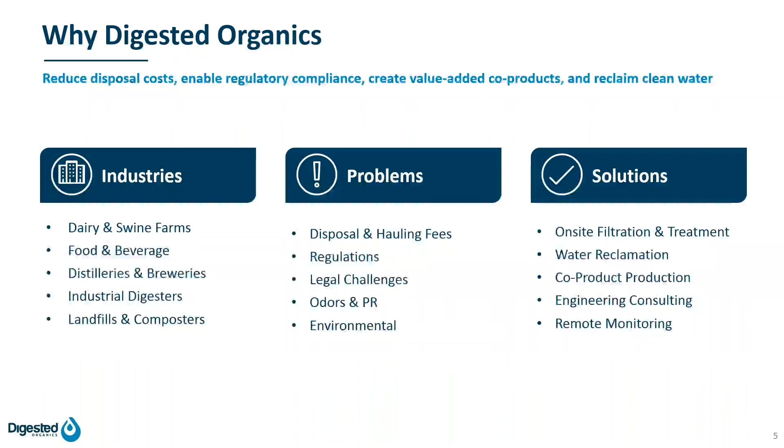They're dealing with ever-tightening regulations. Typically, they face some kind of legal challenge, whether it's to expansion or siting or waste disposal. And they're facing public perception about their waste streams and environmental issues as well in terms of watershed management. We hear a lot about algal blooms today, contamination in the Chesapeake Bay and the Great Lakes. So it's a challenge that's pretty universal. Our solutions are on-site systems that transform waste into clean, reusable water, value-added co-products, and when possible, renewable energy.

A little bit about our team. I co-founded the company about 7 years ago now. My PhD is in chemical engineering from the University of Michigan. Before that, I studied microbiology at Middlebury College in Vermont. That's where I first got into working with cows and dairy farms that had digesters. My first startup company was an algae technology company where we produced animal feed. So I spent about 8 years producing feed ingredients for animals, and now I spend a lot of time working on the back end of animals, helping manage their manure.

Our chief engineer is Ian Charles. He has a long history of experience in clean tech, ran a wind turbine company, a very thoughtful and creative mechanical engineer that does a lot of our design work. And Don Heilman is in charge of business development for the ag sector. A lot of years working in Wisconsin, helping farmers develop solutions for clean water. And I'll just point out too that one of our lead investors is Ceres Partners.

They have a large land holding base as well as a venture type fund that invests in companies like ours that are doing unique, sustainable things in the food and beverage space. So we have 4 key technologies.

I'm going to really highlight 2 of them today in the interest of time, which is our 2-step reverse osmosis and our stainless steel ultrafilter. But in general, we pride ourselves on developing polymer-free and fully automated solutions.

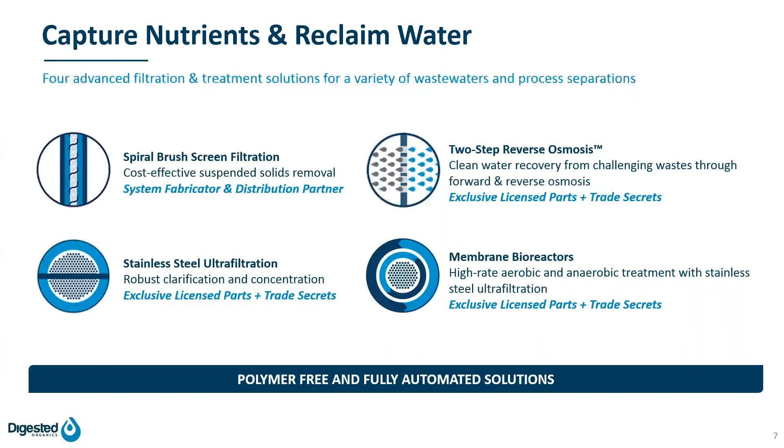So very briefly, we have a spiral brush screen filter. This is a lower cost filter that can process manure and other wastewaters to remove particles that are larger than typically around 10 microns. So the tightest screen is very effective when you have a high amount of suspended solids, like in a food and beverage wastewater or a manure, and you're just trying to reduce that load.

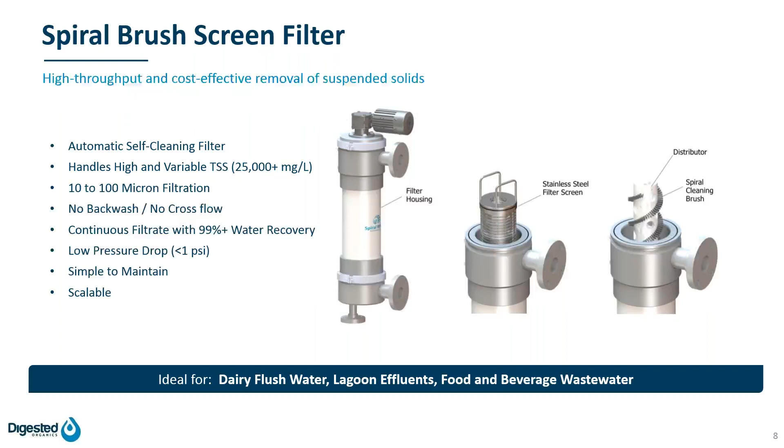Helps keep dairy lagoons cleaner, helps reduce surcharges that a food and beverage manufacturer might have, and it's relatively cost effective, so we can do very high throughput in a relatively small machine pretty cost effectively.

This is a very unique proprietary technology we have called ultrafiltration, which uses stainless steel tubular membranes. And the secret sauce here really is the tubular membrane, its porous structure, and how we can pump the liquid waste we are trying to filter through the inside of the tube. The liquids pass through the wall of the tube while the solids are retained.

So when we're filtering manure, this is a very nearly perfect phosphorus filter. So we can remove like 95+% or more of phosphorus, as well as high degrees of FOG, which are like fats and oils, as well as all pathogens. So we can create a very clean permeate or filtrate, and then a high solids concentrate.

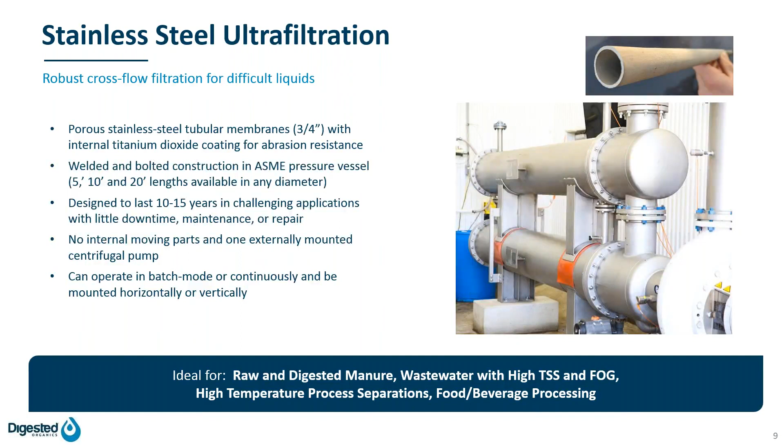And then finally, I mentioned our 2-step reverse osmosis process. It's really a combination of forward osmosis and reverse osmosis. And forward osmosis involves having the material you're trying to filter on one side of a membrane, and then a saltwater solution on the other side of the membrane. And that saltwater solution is saltier, and it actually draws water through this membrane. And so you can think of it as we're basically pulling the water out of wastewater.

That water is then in salt water, and then we use a conventional reverse osmosis system to pull clean water out and recycle the salt. So salt is staying in the loop on one side of a membrane, wastewater is being dewatered on the other.

What's really cool about this is that it's very high flux. That means the water filters very quickly. It's very low fouling, which means it doesn't have to be cleaned very often. And it runs at very low pressures and moderate temperatures. So we can pull water out of wastewaters very efficiently in a way that is much less expensive than using an evaporator or using conventional reverse osmosis technology.

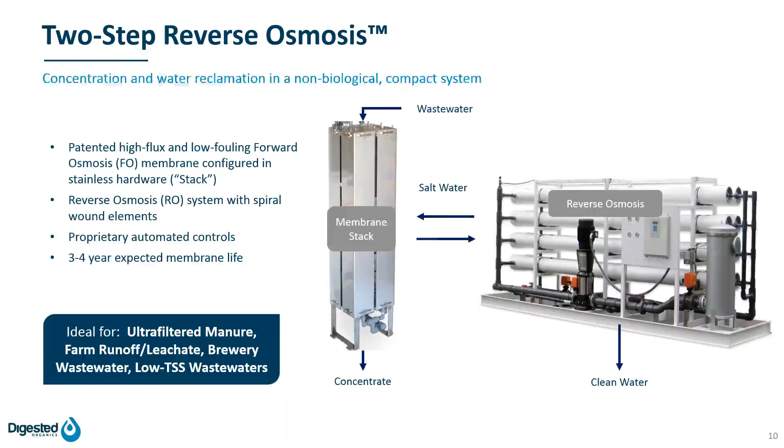All right, so that's sort of an overview of the key filtration technologies. The example I want to show you now is particular to dairy manure. It would be a very similar example with swine manure and could also involve other agricultural waste streams or leachates or even food and beverage type wastewater.

So on a typical dairy farm, we're working with raw manure or with digested manure. And the first step in the process is some kind of fiber removal step. So typically it's a screw press. There are other technologies, but a screw press is probably the most common. That removes a pile of fiber, which that farmer could use as bedding for his cows or could be composted. And this is a fairly conventional piece of technology, not unique to us, but it's the first step in the process to remove these larger particles.

The second part of the process would be the ultrafiltration. And so here we're creating a UF concentrate, which has all of the suspended solids, all the pathogens, all the phosphorus is in that product, which I call a high solid slurry, and it can be used as a fertilizer. And the permeate comes out, some people call it tea water. It looks like a filtered beer or a tea water. And this is ideal for irrigation at higher volumes close to a farm.

So we've removed the phosphorus. In a lot of cases, that would allow a farmer to place higher volumes per acre of that material on their farms. And it also benefits from the fact that it's pathogen-free. It doesn't have solids that can clog irrigation nozzles. So it can be a very nice product to use for direct irrigation.

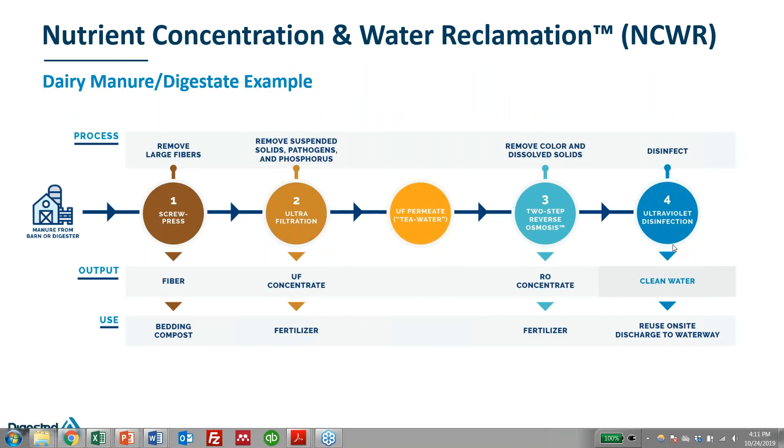So to break down a little bit of what this looks like in terms of gallons and a mass balance perspective, if 1,000 gallons of raw manure went into a screw press, typically we'll get about 90% of those gallons out as what we call pressate or liquid manure. Those 900 gallons would go into the ultrafilter and split into about 675 gallons of tea water and 225 gallons of concentrate. So that's a 75% recovery in the UF. And then if we do the similar 75% recovery in the FO/RO system, we'd have about 175 gallons of concentrate and 500 gallons of water.

So on a raw manure basis or raw digestate basis, we're at about 50% recovery of water. 50% would be recovered as two different fertilizers. The UF concentrate is a high phosphorus fertilizer, and then the FO concentrate is a high ammonia, high potassium fertilizer. And because we haven't introduced any chemicals, these are both organic certified fertilizers, which could be brought to nearby crop farmers or used on the farm itself.

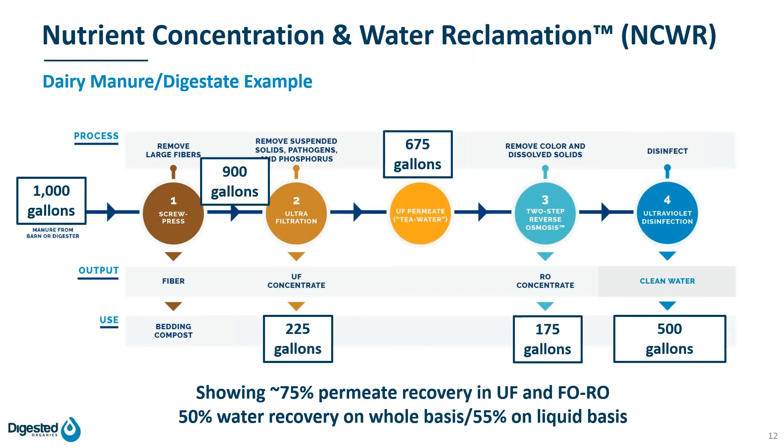Another example I want to point out particular to farms today is leachate. So leachate is any wastewater, typically like rainwater that falls on concrete and then is collected on a farm, and some of these larger farms have potentially acres of concrete, and so lots of rainwater is collected. That leachate is relatively dilute from a wastewater perspective, but it still, in many cases, has to be handled just like manure. So it has to be collected in a pit, and then it has to be stored on land, and that can be expensive for the farmer. So he's looking for an option to more cost-effectively handle that.

And because that wastewater doesn't have a lot of solids in it, it can go right into the two-step RO. We don't need to do the ultrafilter. We might use a spiral filter if there were lots of suspended particles, but for the most part, we can recover very high volumes as water, and that's pretty unique with our technology. So we can get out 90% of the leachate gallons as clean water at a very low cost point. So it's a nice alternative to farmers storing leachate in manure lagoons. Just collect it and process it, feed that water back to your cows, and then you could just store the concentrate in your manure lagoon.

And one point I like to make here is that people who are concerned about nutrient runoff when farmers spread manure know that the thicker the manure is, the less likely it is to run off. So imagine putting water on a field. That's more likely to physically run off a farm field than something that's thick, like a thick pea soup. So it doesn't make a lot of sense to store leachate, which is basically water, in a manure lagoon because you're just diluting your manure and making it thinner. So we encourage farmers to keep their manure as thick as possible, and the UF concentrate is even thicker, so that's even better, less likely to run off, and then treat your leachate independently with a system like this.

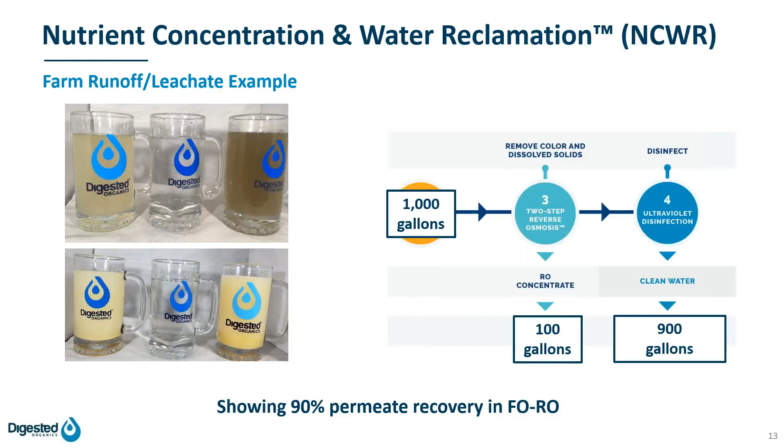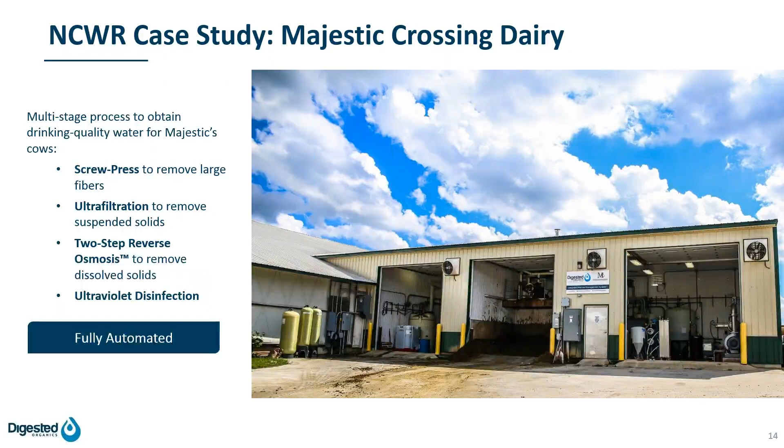All right, so this is now a case study of Majestic Crossing. This is a farm in Sheboygan Falls, Wisconsin that installed our system about 3 years ago. They have 850 cows, and they bed on sawdust. And so the manure is collected by a scrape system. It's screw pressed, it goes through the ultrafilter, it goes through the two-step RO, and then clean water is fed back to the cows.

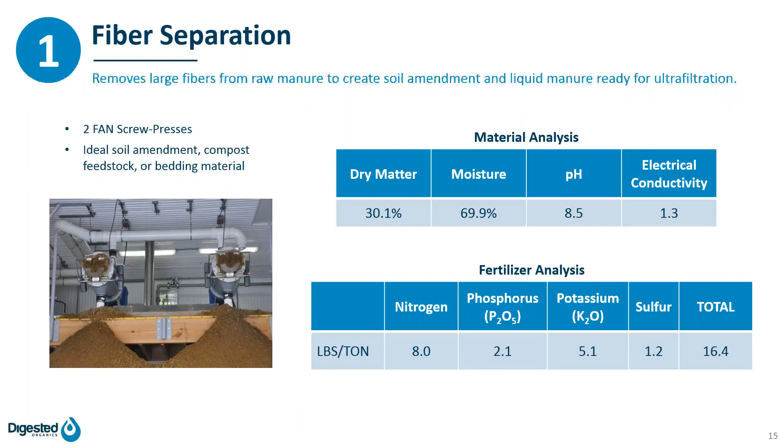So this is a picture of the screw presses in action. Manure is pumped into the top. Solids fall out the front of the press as a sort of a dry, crumbly product that the farmer composts and land applies. And you can see here it's about 30% dry matter and about 70% moisture. And this is, again, a very common technology found on a lot of farms.

This is our ultrafiltration system. So it is, again, a tubular cross-flow filter. We're circulating the manure inside the tubes. The liquid fills the shell, and then the permeate comes up the top through this sight glass. So this is a picture up close what it looks like. Again, sort of a filtered beer look to it. So there's no solids. It's transparent. You can see through it, but obviously it has color.

And then this is just a picture of the tube sheet. So basically, if you cut open our ultrafilter and look down it, each of these holes you see is the opening to a 10-foot length of that 3/4-inch pipe. So basically, we're pumping manure through a lot of pipes in parallel, each of them providing filtration. And this system, actually, this presentation is a little out of date, it's over 1,000 days. And so we have a lot of good experience with a lot of data, and we think it's a very robust solution for this application.

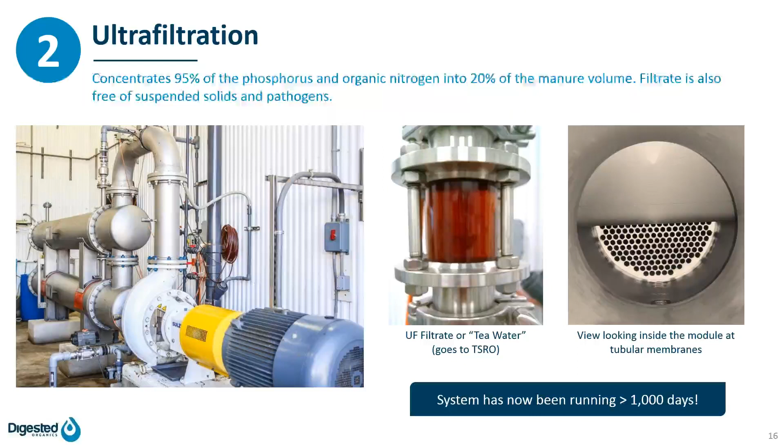A little bit of data just to back that up, both from Majestic and from other farms. This was a 70% permeate recovery. So 100 gallons of digested manure became 70 gallons of permeate, 30 of concentrate. And you can see here that the digested manure was 4.4% solids or dry matter. The permeate was about 1.5% solids, and those are all the dissolved solids, all the salts and any soluble organic matter. And then the concentrate was 10% solids. And that is a very nice concentration factor.

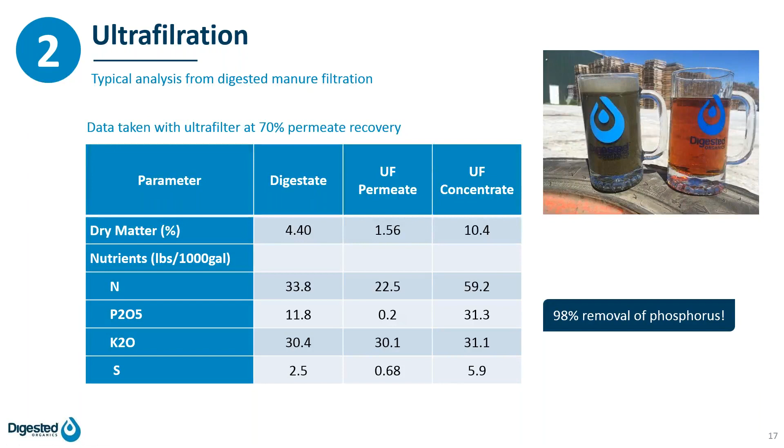And again, so you have a thickened slurry with all the phosphorus. And you'll see here on the phosphorus line, the P2O5, we came in at 11.8 pounds per 1,000 gallons. The permeate had 0.2. So that's over a 98% removal of phosphorus, which is, as far as we're aware, the most efficient phosphorus filter available now for manure.

I'll just mention quickly that we were involved in the Vermont Phosphorus Innovation Challenge, and part of that work was to show that indeed our ultrafilter does remove phosphorus from manure, and we can help concentrate all the phosphorus from a farm into about 20 to 30% of the volume. And then if we handle that volume more responsibly, we've done a lot to help keep phosphorus from contaminating watersheds. And so one way we do that is we transport the phosphorus-rich concentrate to a composter. He can top dress piles with it. He can incorporate it into different recipes.

And so we actually did this. We created a recipe that involved some of the fiber from the screw press, some of the ultrafilter concentrate, and then some wood chips. And the composter was very impressed. We made a product that had about twice the nutrient content. You can read our full report through the VPIC program.

And that's a program that we are helping to roll out in Vermont to create a hub and spoke model, where you have a hub as a composting site, and then you have spokes of farms that have ultrafilters, and you can bring the UF concentrate from these satellite farms to the hub to be composted. And then once it's in a stabilized composted form, it can be either used more responsibly in the watershed, where farmers still do need some phosphorus nutrition for their fields, or it can be exported out of the watershed where it's no longer a risk to contaminate the nearby waterways.

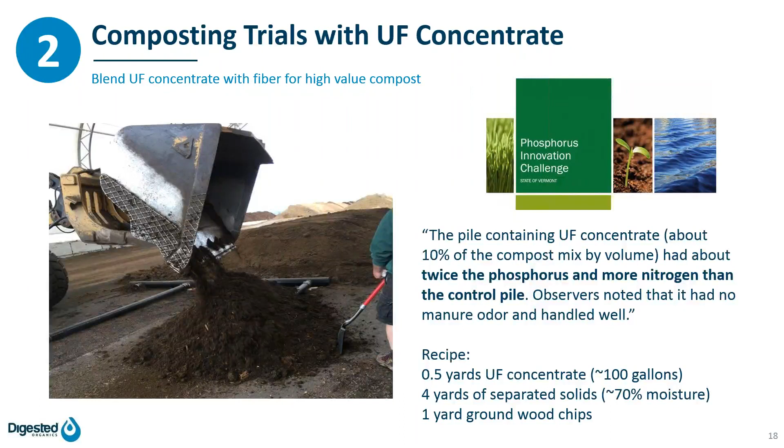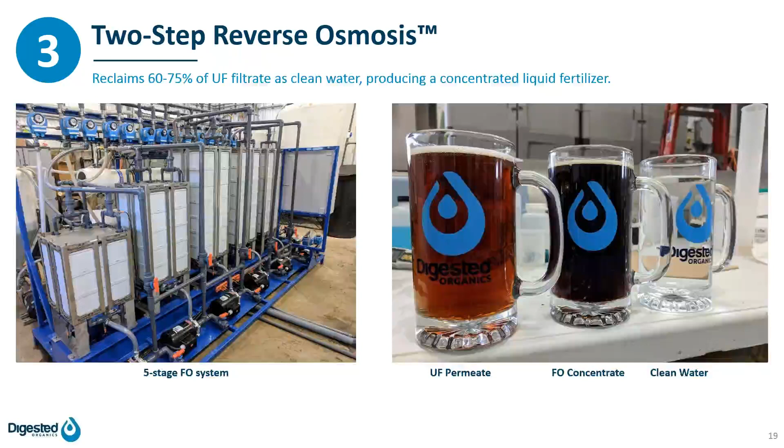A little bit of data on that. We can make about a 5% solids FO concentrate. Again, these are all dissolved solids, and it'll be about 35 pounds of nitrogen and about 48 to 50 pounds of potassium. So again, it's a high nitrogen, high potassium product, and our water is clean enough to discharge and clean enough to feed back to animals.

So we're actually one of the first groups to get a discharge permit to put water reclaimed from manure into a waterway in Wisconsin under an NPDES permit. And since then, there have been several other applicants that have sort of gone through the same process. But a couple of years ago when we did that, we sort of paved the way for that to become

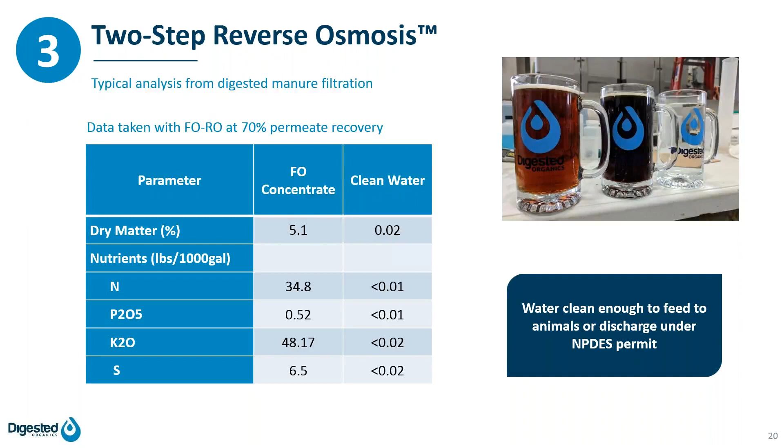more commonplace, and we think that is a good option for farmers, but we do also encourage them to think about how to reuse that water on site, whether it's feeding animals or using it for irrigation in a dry year and increasing their crop yields.

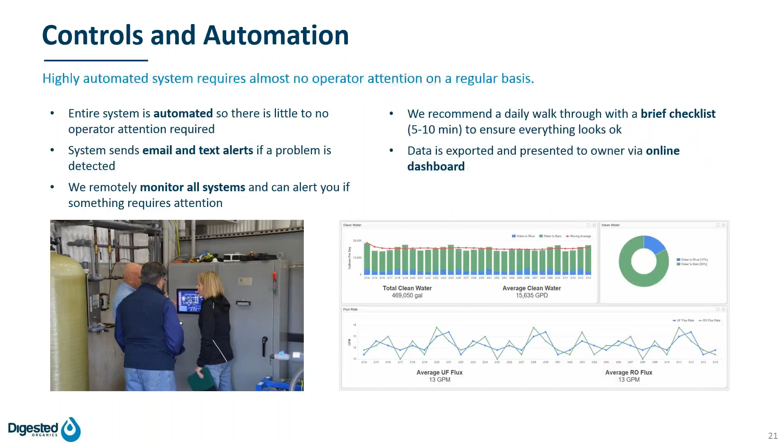Like I said, our systems are fully automated. So this is a picture showing an automation screen at the farm. We have an online system we call Biometrics, where the farmer or the user can log in and see how many gallons of water it made today, how the filter was performing. So we try to make it very user friendly and very intuitive, so it's not an extra burden on the site.

We do a lot of piloting for new potential customers and for new applications. So all the time people call us and say, hey, I've got a mix of swine manure and dairy manure, or I've got swine manure plus food waste, or I've got digested food waste, or any kind of unique stream. And sometimes we can say, oh, we've done that, here's what we think it's going to look like.

Other times we say, you should really send us 30 gallons in some buckets, and we'll run it on this small scale equipment first. We can show you what it looks like visually, as well as do analytical assessment of the feed stream, the permeate, the concentrates, and then we can size equipment from that. So that's always something I like to point out to people, is that our equipment is very scalable.

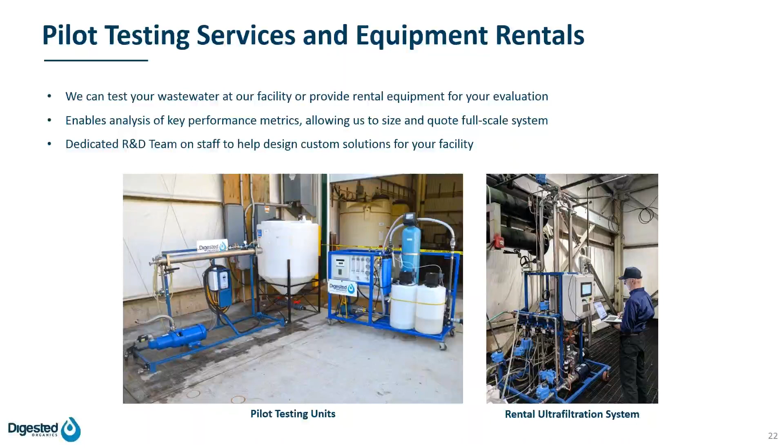So we can show up to your site, and on the right here is a picture of Ian doing some work on a rental unit that was at a customer's location, where it was running for several months to demonstrate how the process works for them. So we like to be able to demonstrate our process at a small scale to both educate our customers about how it works, and also to collect data so that when we scale up, we have the appropriate size equipment.

So kind of just to summarize, we think we have one of the only integrated solutions for going all the way from a wastewater like manure to clean dischargeable water with a non-biological system. So you'll notice I didn't talk about adding additional digesters or aerobic treatment systems or anything else. So this is just unique filtration solutions paired together to create an integrated package.

We have relatively low operating costs, and I'll talk a little bit more about that. I think that is competitive typically with the cost that most farmers have for land application of manure. We can do a lot to eliminate lagoon management challenges. So if you talk to a dairy farmer, a lot of them will say, one of the things that keeps them up at night is their lagoon filling up. And if they get a big rain, it could overflow.

They have to deal with tightening regulations about when they can apply, which lands they can apply to. They tend to sort of fight over the same trucks. Like when it's a nice dry day and everyone's trying to spread manure, everyone's calling the same guys to come run their trucks. So it causes a lot of anxiety.

And if you had a system that was constantly turning your manure into water, you could choose to put manure nutrients on your fields and on your crops when your crops needed them, and not when you were stressed about your lagoon being full, which is what happens a lot.

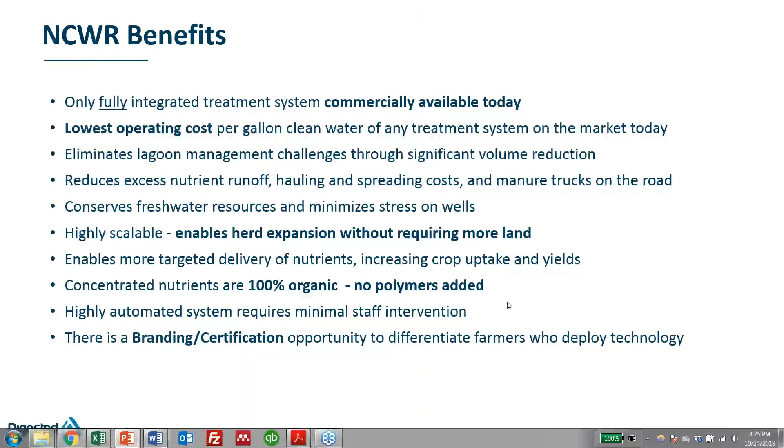And if you convert that into cents per gallon, I typically tell people I can take a gallon of manure and turn it into a gallon of water for about 1.5 to 2 cents per gallon of water, assuming typical average electricity rates, average operator costs, things like that. And most farmers in Wisconsin right now, unless they're in a unique situation, would say they spend 2 to 3 cents per gallon hauling material out of their lagoon.

So if I can make a gallon of water for 2 cents and I have all these ancillary benefits of lagoon management and less soil compaction and fewer trucks on the road, we think we have a very interesting and compelling solution. On the leachate side, I would say it's even more compelling. So if you have a big farm and a lot of leachate and you're being forced to put that in your manure lagoon, we can make water even less expensively.

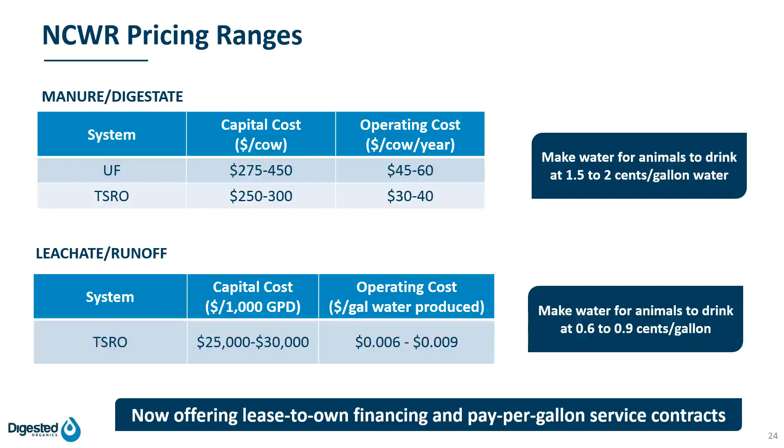And we're also working with certain partners to offer infrastructure as a service. So some groups will want to buy the system and own and operate it. Some groups will not want to buy it. They'll want to pay per gallon. And so we can help finance that as well, like a lease type approach.

So it's kind of a nice way, again, to reclaim that waste, turn it into something useful, and simultaneously significantly reduce costs. Sort of a similar story with the carrot processor. They were putting raw wastewater into a lagoon and trying to land apply it. We could make a filtrate that they could reuse to actually wash carrots with, and then a concentrate that was an animal feed, and they were shipping to a nearby dairy that was feeding it to cows.

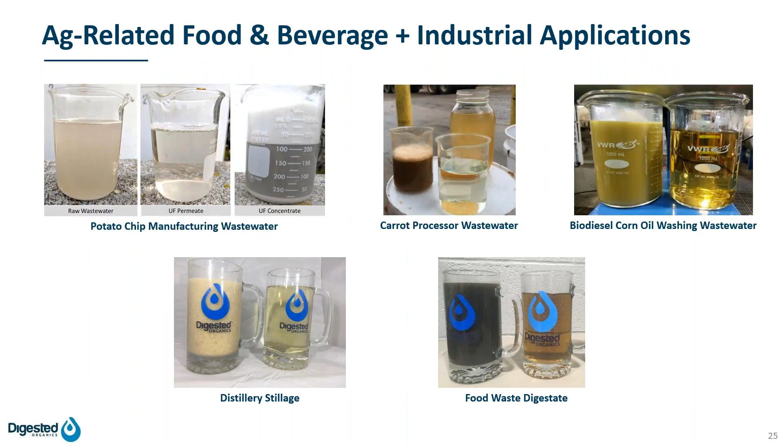And so we can help them filter that, both using our UF and our two-step RO, and put most of that water into a nearby stream, let's say, or even into a sewer, and then a concentrated fertilizer could be sold to nearby farmers or marketed more widely. So that's a little bit about what we do.